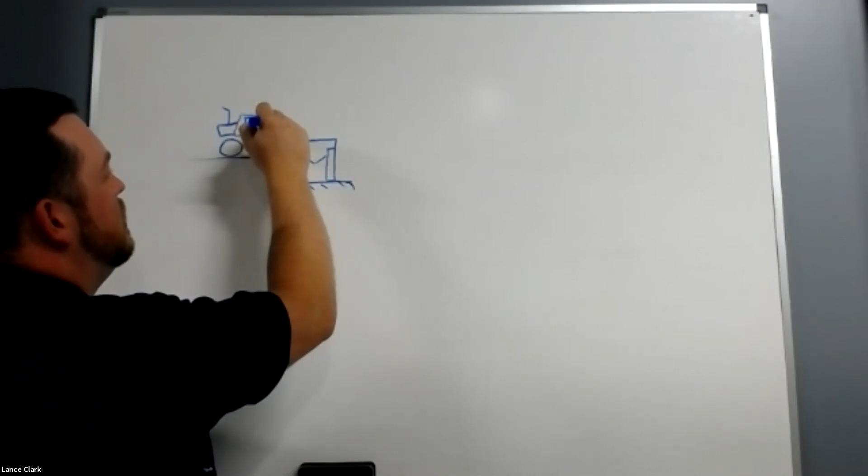He's got to feed that. That's a terrible loader, I know, so don't make too much fun of me, right? It's got an exhaust stack and windows, all that good stuff. Put a door.

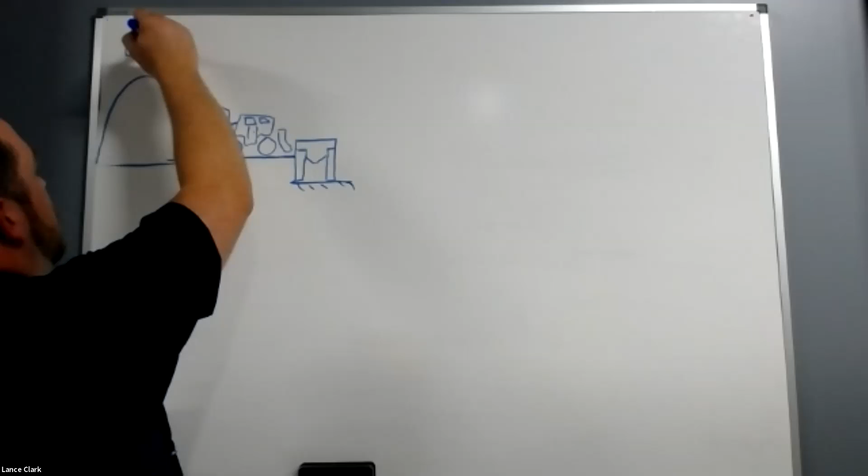So what's going on over here? He's loading this, but he also has a stockpile, right? And as moisture comes down and soaks these piles, if there is nothing to keep the water from draining off, then it will just pool up under the pile.

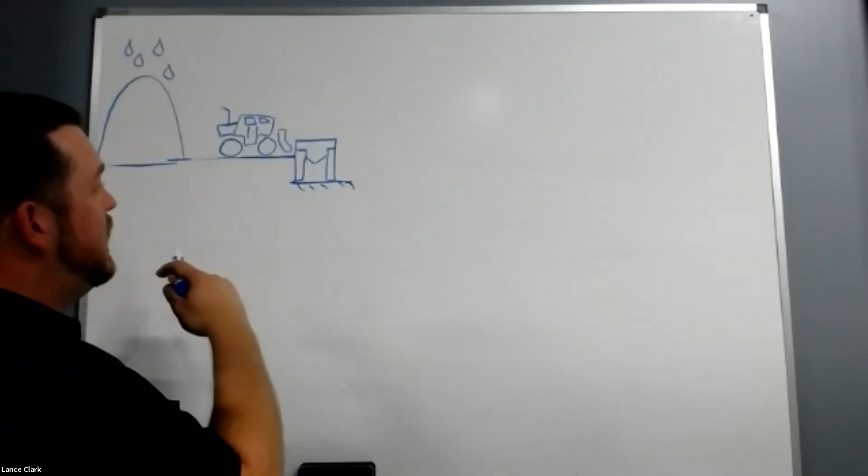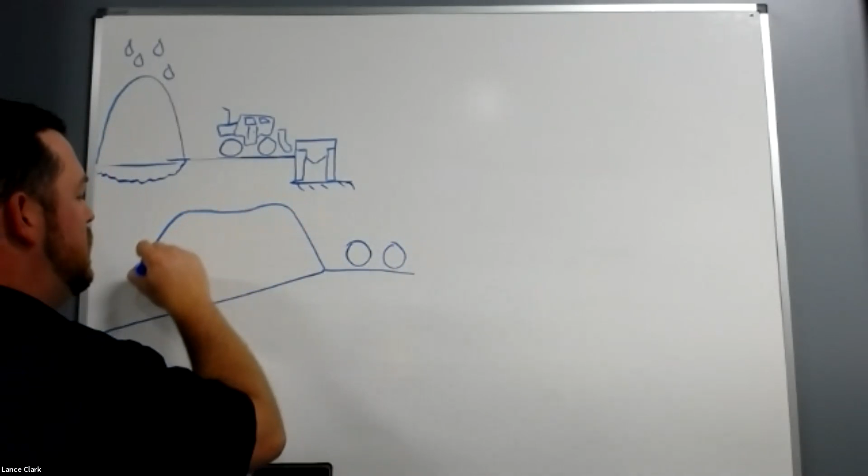So ideally what we would want is, as the loader is feeding this, that we have a slope to maintain. And the loader is still here feeding the bins, and the aggregate pile comes down like this and allows the moisture to run off and collect down here.

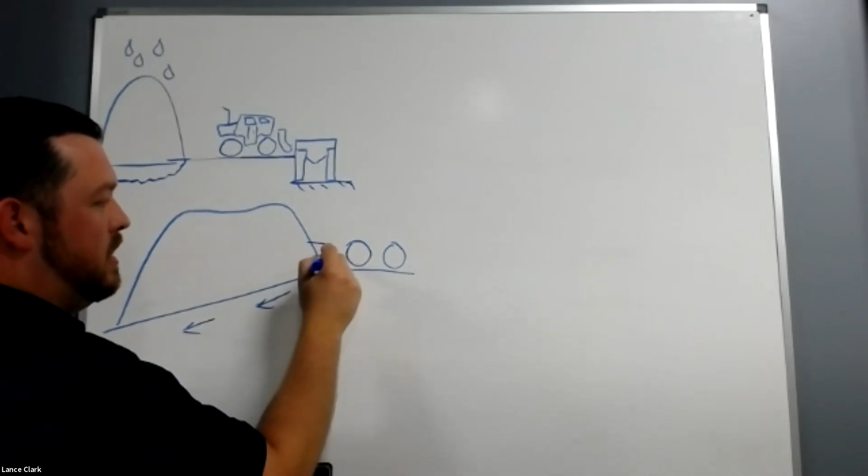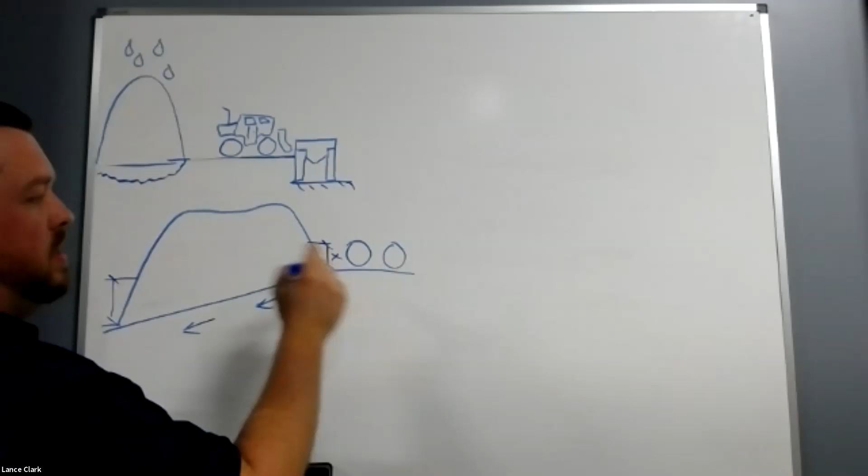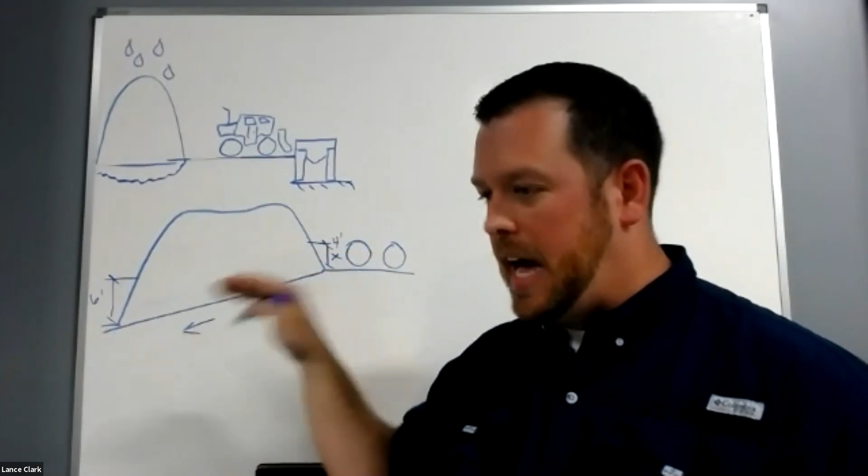And the loader, of course, you want it to try to grab a bucket here in this area, but you also want this to be about the same distance. And typically this is somewhere around 4 to 6 feet, just throwing a number out there. 4 to 6 feet. I hope everybody can see what I'm writing here. And what that allows is the moisture to get out of the material before it ever goes into the drum.

Now, again, I realize that not everybody has, trust me, I know the arguments, right? We don't have the space, we don't have the place for it, we don't have the drainage ability. There's a ton of we don't haves that we can list out. But my job is to just tell you best practices. So this can't necessarily apply to every single asphalt plant. However, if you have the ability and the room and the real estate to do it, this is the easiest way to get moisture out of a product without burning fuel.

Now, here's another really good thing: the different products act differently, right? I'm sure all you QC guys out there nod your head. Some of the products act completely different. So if you have a sand or a screening pile, it is going to retain a lot more moisture than your 57 stone or your 5s or whatever range that you guys have it in, from 1 inch to 1/2 inch stone.

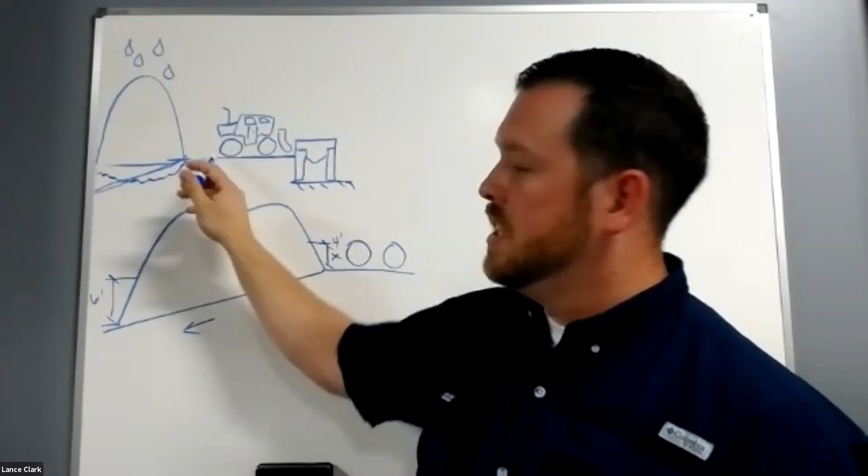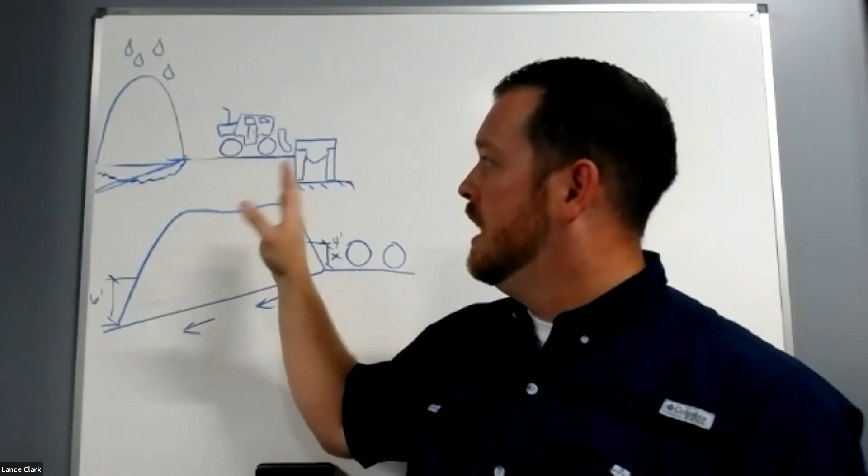So like in this picture here, if you were to have sloped that like this, the loader is still on the same elevation as the bins. And now you don't have that uphill pull on the transmission of the loader. So now you're saving wear and tear on the loader as well, because you've got to remember in that mix cost estimate, equipment is in there. So think of the money that you could save, or the maintenance that you could push off, if you didn't have the extra wear and tear on the loader too.

So that's my thought. I could mic drop right here and be done, but I've got two more things I want to talk to you about. But I hope if you get nothing else from this today, that's what you take, because that's something that you guys already have, right? Everybody has a motor grader, everybody has a paver, and most of the time you can get a truck. It's just having the money and the effort to do it.

Now, everybody's a little bit different in their costs and their fuel savings. So I'm not going to say you're going to save $1 million a year doing this, because everybody's scenario is different. I know I'll get hung up and they'll say that Astec guy told me it was going to save me $1 million and it didn't. So I'm not going to go down that path. I'm going to keep moving on.

And the next thing that I want to talk about is a VFD for the exhaust fan. That's something that is pretty commonplace, right? I know probably when I said these three things at the beginning of the presentation, you guys were like, oh my gosh, these are three things I'm already doing. Well, you would be surprised. I literally visited a plant, I guess it was 2 weeks ago now, and he had just that month put a VFD on his exhaust fan.

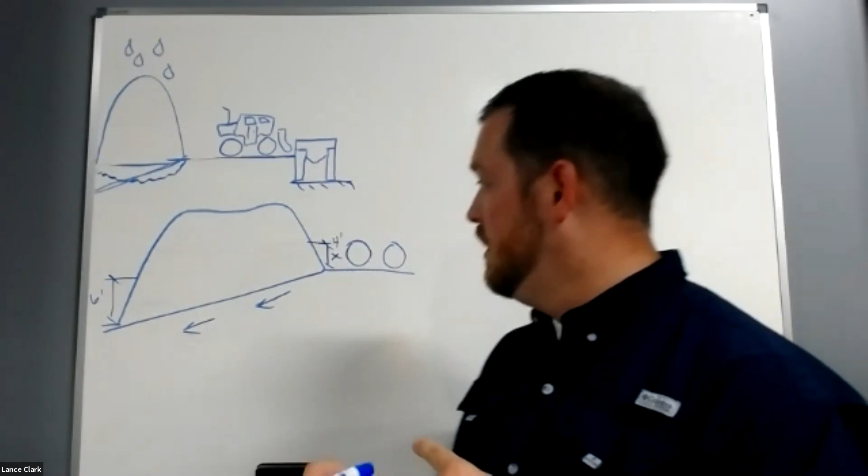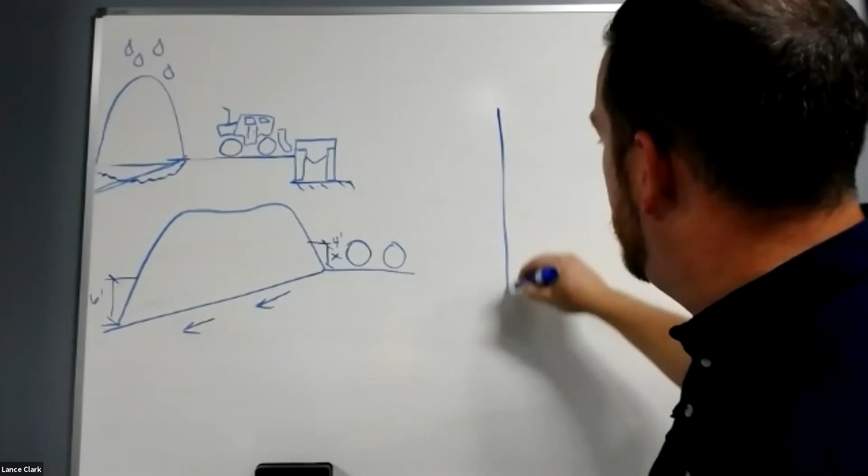So I'm going to turn around here again. I'm going to erase, actually, I'm just going to do it right here. That's okay, I might step out of the camera a little bit. I'm probably going to do a terrible job at this, but I'm going to try. So we're just going to do a regular XY axis. This is going to represent pressure through the system, and this is going to represent airflow.

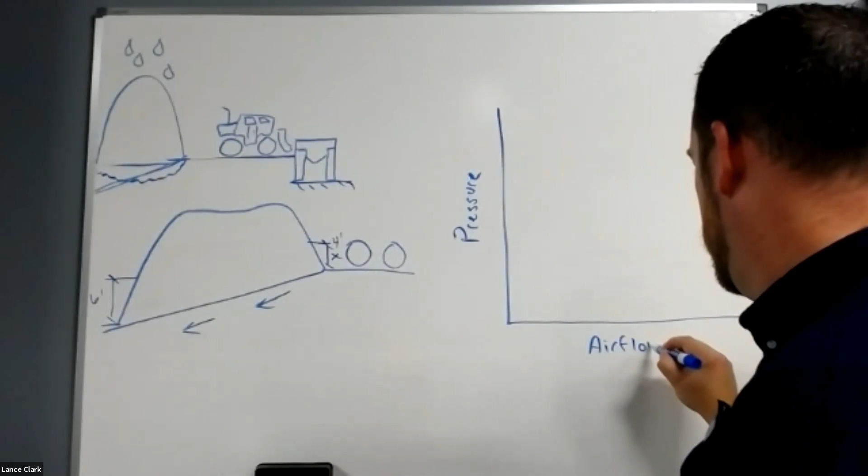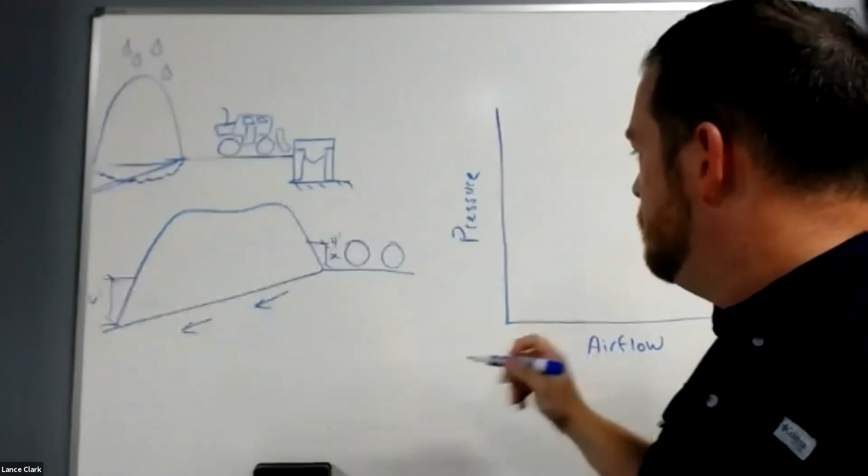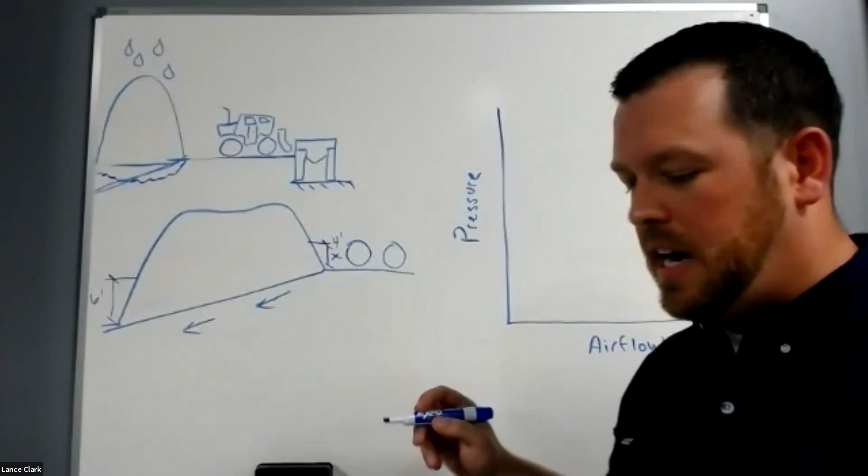And on a common asphalt plant, and again, I know everybody's is different. Mine's set up this way. This is over here. I've got elevators and you've got drags. But through a typical system, going through the entire system of the ductwork or through the drum and trying to understand that airflow, that curve, that fan curve, if you will, looks something similar to this.

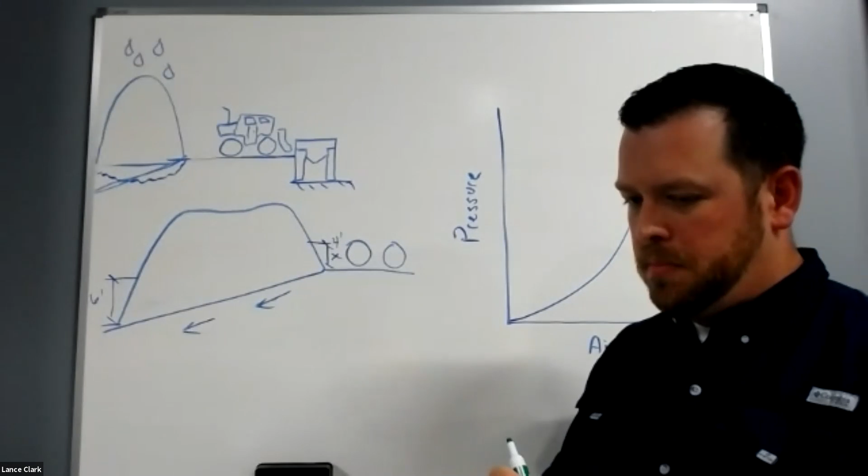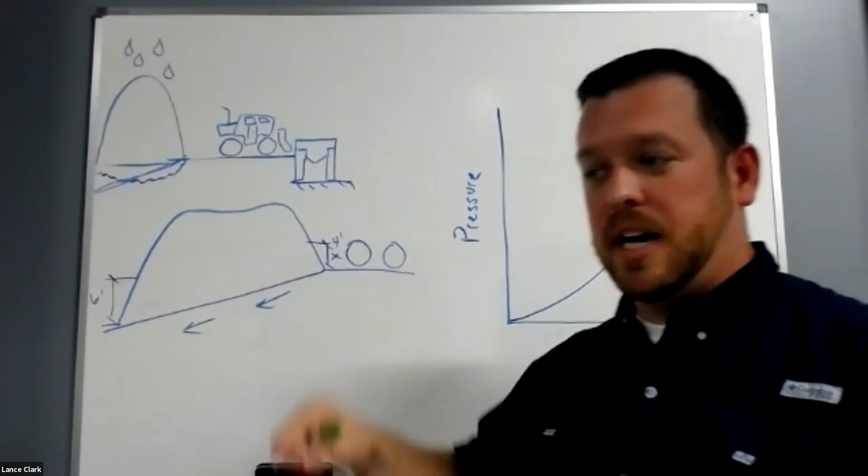So as the airflow increases, the pressure increases. I'm going to change colors on you here. And the motor, the actual fan RPM, looks something similar to this. When it starts, and this is on a mechanical damper now, right? I'm sorry, I'm probably talking two different speeds. This is going to be based off of a mechanical damper. So with a mechanical damper, you hit go and boom, it is turning. So it's automatically at my top, and as it changes, it does this and kind of falls off.

Sorry, I know I didn't mean to do that. Sorry, I was standing right in the way.

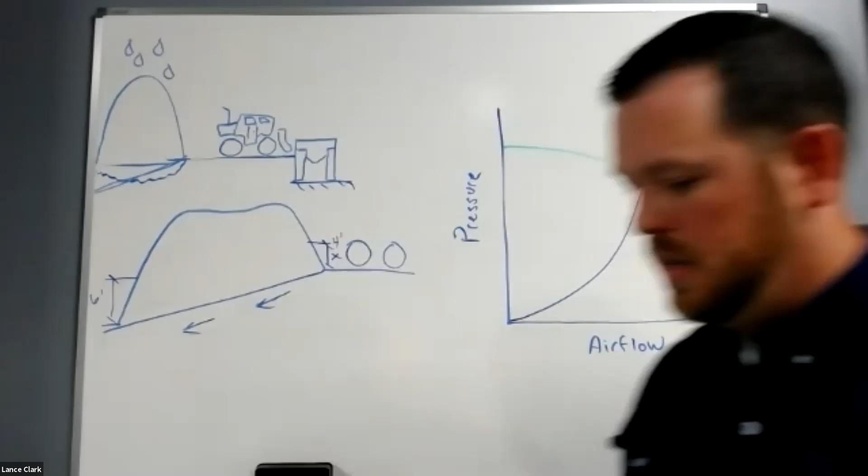So if we add in horsepower, it looks something, I'm going to change colors again, like this. So what does that mean, right? You're like, dude, I have no clue what you're even talking about.

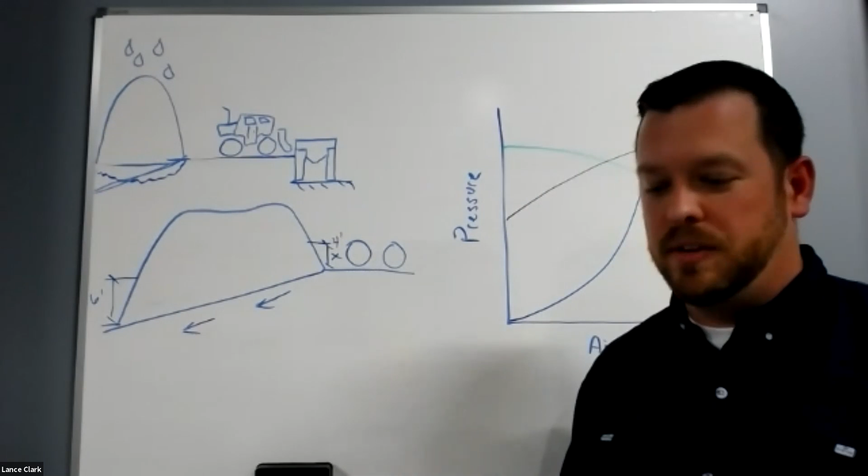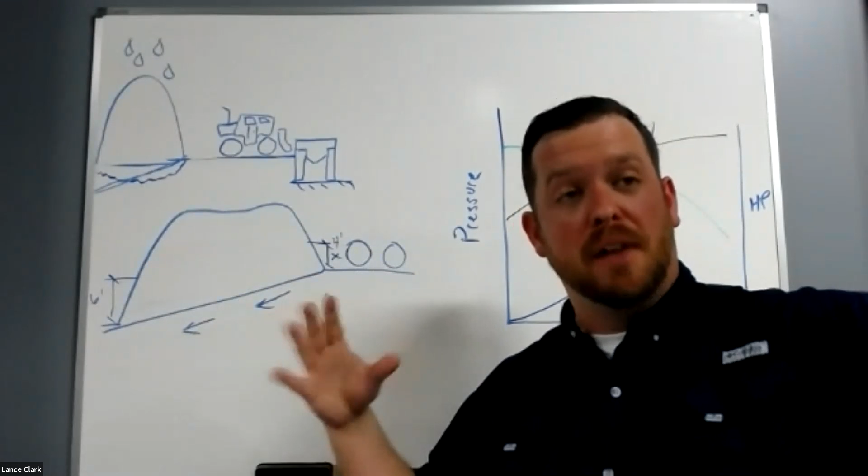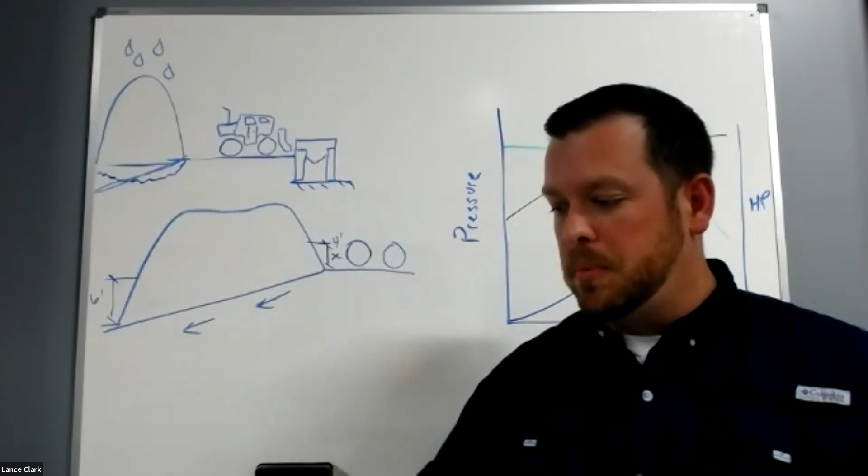What we have is the baghouse fan damper is way down the line, right? It's sitting right on top of the fan. So if you have an issue at the front of the system, like you're puffing, you've got too much airflow, the drum is puffing, right? And it's puffing too much and you have to increase it or decrease it, whichever direction you're going, up or down. As you change that airflow, it tends to get off skew if you're increasing or decreasing.

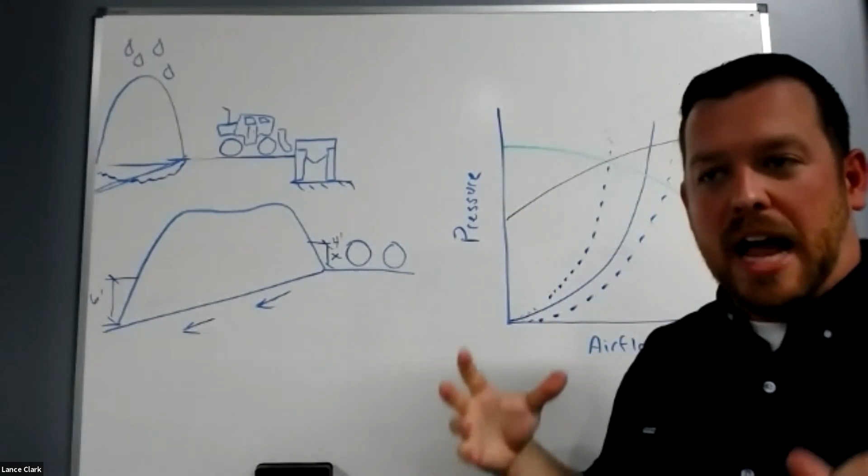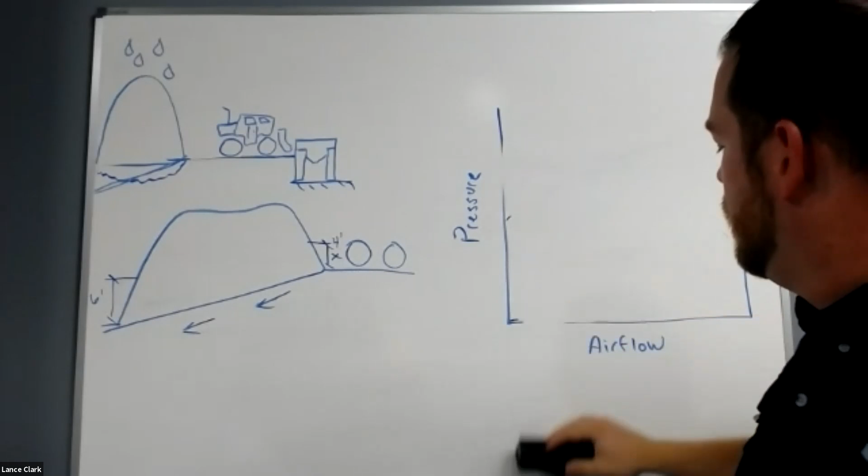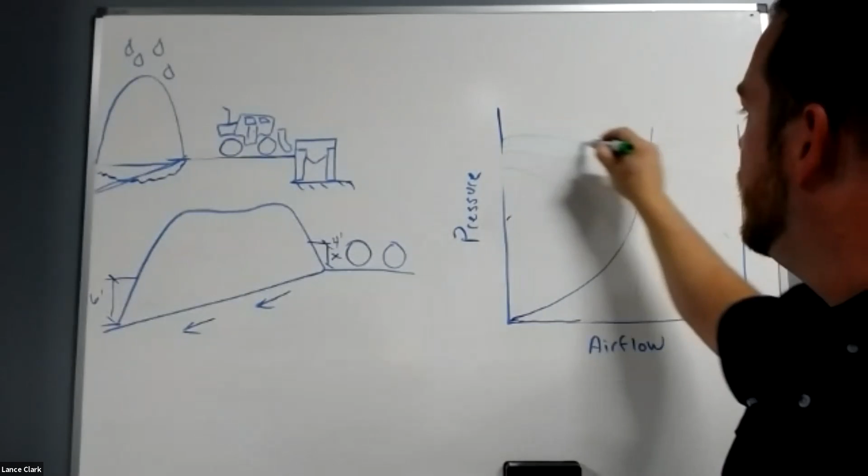So your fan curve will change because you're adding more pressure into the system, because you're essentially choking the fan off, and you're adding more pressure into the baghouse as you're doing that. But what happens when you add a VFD to the system, this neat little curve right here that we had for our fan, now all we have to vary is the fan RPMs. So instead of here, we can vary it down to decrease production, or we can vary it up to increase production. And guess what? There's no damper for opposition in the system. There is no extra added static pressure.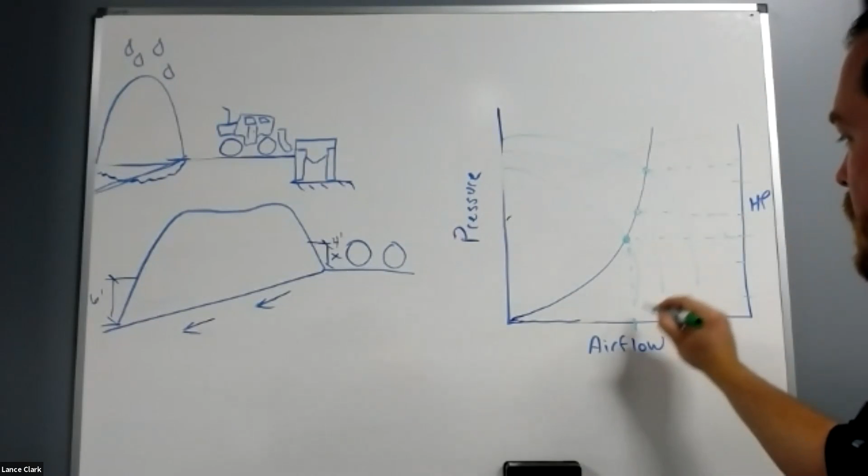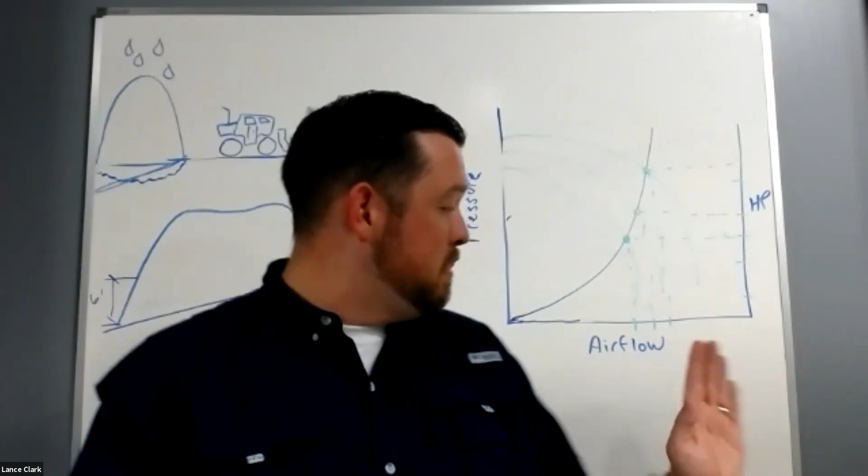And if you look at the horsepower when it comes across, like if I were to have lines here, you probably can't see that. Look at the horsepower requirements, where they are in association to these curves. So as the airflow increases up here, and your RPMs change on your motor, you're speeding it up and down, your horsepower changes. So what that allows for is at 50% airflow, you're only at about 12% of the power required. And at 75% of the airflow, only 42% of the power is required.

So think of the savings that you're going to get by adding a VFD in this system, just by controlling the power demand at the asphalt plant through the fan. Just by varying the speed, you're consuming less energy. Now, what I said earlier that's great about this too, is that you also save on the wear and tear of the fan. You're not turning it wide open all the time, also increasing and decreasing the static pressure inside the fan. So you're really giving the fan a break by adding that VFD on there.

So there's also a second way that we can look at this too. And this gets into some stuff that, not that I understand this overly great, but on the utility side, there are periods that your utility company will look at, and I've heard as low as 15-minute intervals, and I've heard as much as 30-minute intervals, and they will measure that interval and whatever peak demand you had at that time.

So at plant startup, when you're boom, boom, boom, starting all the motors, the electrical demand is going up and up and up. If they look at that 15-minute interval, they are going to charge you the highest rate because of the demand at the plant. But adding a VFD to the largest motor at the plant, typically, I know some motors on the drums can be very big, but typically the baghouse motor is a big draw.

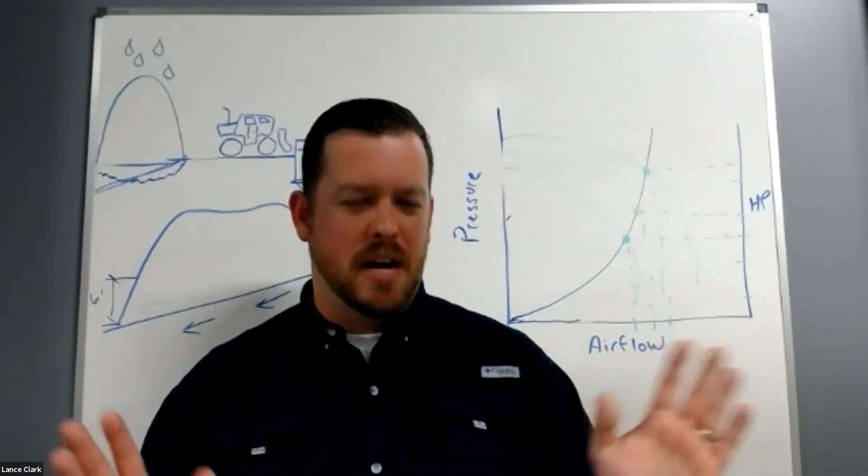And again, I know nobody on this call has ever had that happen, right? Not a single person has ever had that happen, right? And you guys are perfect, and I'm the only one that has to deal with that kind of stuff. I understand. But

in the years that I spent on the road, calling on customers and specifically talking about liquid asphalt storage and heating and transferring materials and keeping it good and hot, it amazed me the amount of contractors that would not insulate their piping, and honestly would knock down, drag out, argue with you about it. And I've said it multiple times, us as an asphalt contractors community, we don't shy away from our opinions, do we? We like to give our opinions. We like to tell each other what we think's better, and you're dumb for running that.

I'm not advocating that. I'm just being real. It's that we like to pick at each other and say that one way is better than the other.

Well, I primarily focused on customers that were in the south central part of the U.S., so like Texas, Oklahoma, Arkansas, Louisiana. A lot of those states were in hot zones. It's always hot in Texas. It's always hot in Louisiana, and even now, my heart goes out with everything that's gone on with Ida.

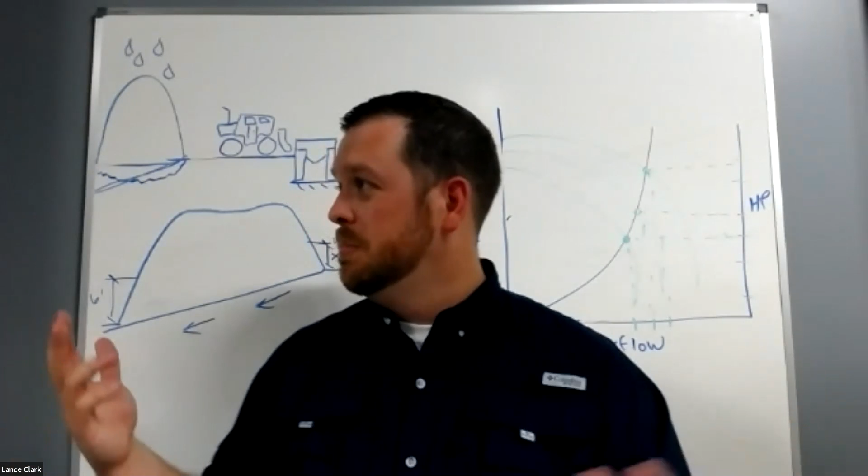I'm here at Astec Industries today, in Chattanooga, Tennessee, we're right on that band, and we've got some terrible weather out here today. I don't know what you guys are experiencing, but we're seeing the effects of that today, and it's just heavy rain. My heart goes out to the folks that have struggled in New Orleans with Ida, and a lot of them were contractors that I called on and have a great relationship with, and I feel for those guys, because I have no clue what they're going through right now. I'm sure their panel boxes and trucks are underwater. So definitely feel for those guys.

But the point that I'm trying to make, I'm sorry I got off topic, is that those guys, when they live in those states, just automatically think, well, it's hot outside. Why would I need insulation? It's 90 degrees out here and 100% humidity. I'm sweating as I'm talking to you. Why would I need to insulate the piping?

Our previous service manager at Heatec, his name was Ron Henry. Some of you guys might know Ron. Ron used to always say, when the ambient temperature outside is 300 degrees, come talk to me. So I always liked that saying, because hot is a relative term, right?

Think of the difference between 70 degrees and 90 degrees, say at the same humidity. It's hotter, right? Well, that's 20 degrees difference. Now think of 200 degrees difference from that, to go up to 300 degrees, because all you guys are running heaters set at 300 or maybe even 320 or 330.

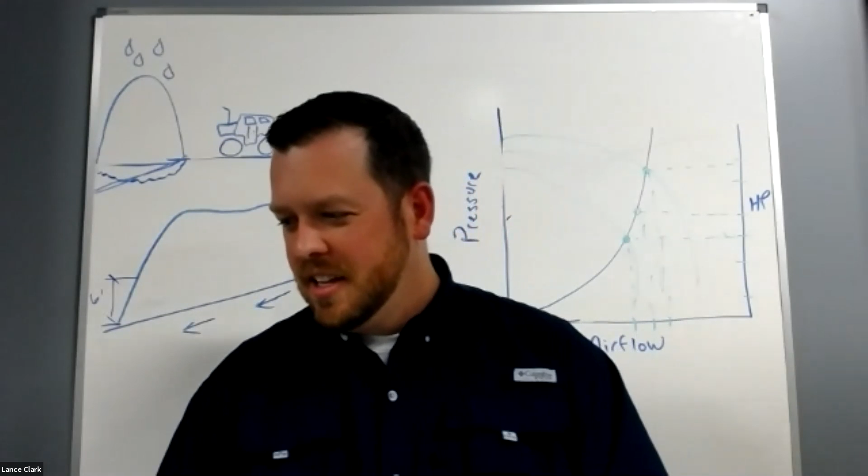All right, you guys are awesome. Everybody said yes. Good for you. I am proud of you. If I could give you, I hope you can take that, that's a high five because you guys are awesome.

So most people don't do that. They don't tune their heaters up, and they can get out of whack, because we want one that's modulating, right? We want one that, if it requires more heat, ramps it up, and if it requires less heat, ramps it down. Almost like a VFD, right? A modulating motor, so that way you're not running full bore or any lower. You want something that will modulate, so you're saving fuel and you're saving energy.

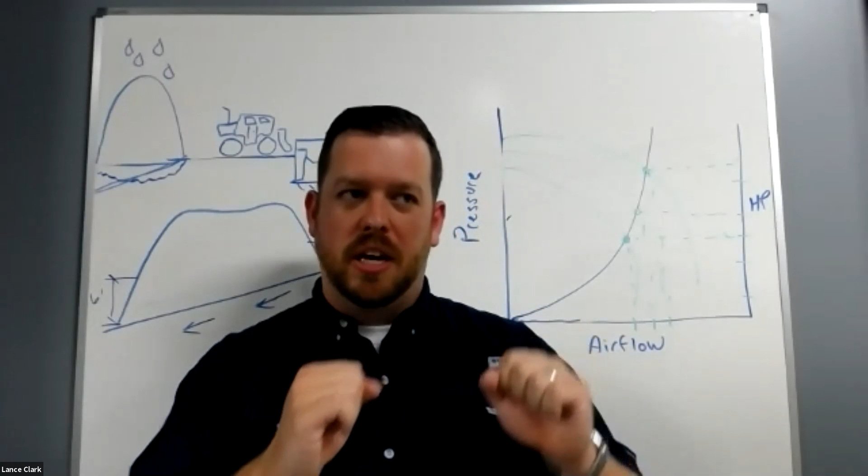Well, as they do that through the year, it will kind of work that mechanical linkage loose. So it's always important to have somebody come in and test it and make sure everything's looking good. You're not burning unused fuel, you have the right amount of air going through the system, and everything is happy. Because we don't want to shut down, right? We don't want to be, oh, the heater just crapped out, now we got to call the trucks off. That's a bad day, right?

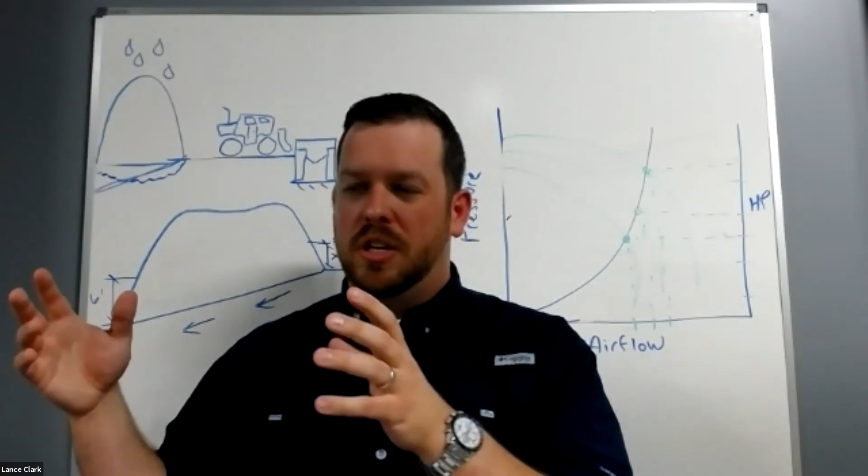So if there's anything else I can say as far as the tank farm is concerned, it's that the heater will run most efficiently as long as you're maintaining your heat load. What I mean by that is that your terminal or the refinery or the wholesale, wherever your liquid is coming from, it is easier to take it off the truck at 300 plus degrees, because they're going to heat it up to transfer it, right? They've got to heat it up to pump it into the tanker, and they have to maintain that temperature so that when they offload into the tanks, it all gets out. You don't want to be carrying a tanker back with residual in it.

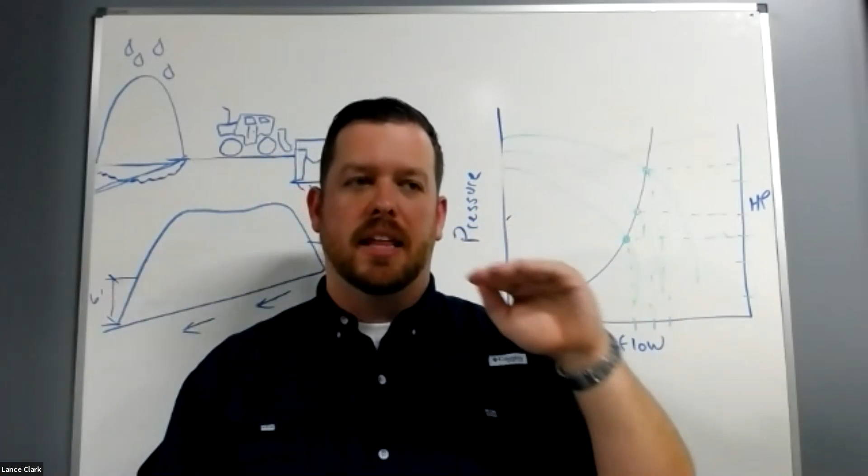So it's easier to put hot liquid in the AC tanks and maintain that temperature, as opposed to letting that temperature fall and then boosting it up to where you need it for production. Because what do we do at the asphalt plant, right? We turn the mix up. We get that guy in there that says, man, I want an extra hot load, right? I want it extra hot. Well, it's easier to keep your material at temperature just as you put it in. The heater will run more efficiently doing that, meaning it is going to burn less fuel.

Maintaining that temperature, as long as the tanks have plenty of insulation, the right amount, and you don't have any jumpers restricting flow in the system, and it's got good flow, you're going to be fine. The heater is at its most efficient point, especially if you tune it every year like you guys have. So it's critical that we try to maintain what I call a maintenance load. Have the tank farm on a maintenance load, so you're not boosting your asphalt temperature all the time and wasting fuel with the burner running wide open and turning off.

Because remember, this scenario is similar to the tortoise and the hare. The big burner on the drum, you run only as necessary. Yeah, it uses more fuel, but you also turn it off at the end of the day. You run your shift, you turn it off. What's out there purring all night long, day after day? The burner on the heater. So if it is tuned right and it has good flow, you won't have any problems, and it's running as efficiently as it can.

And this is just a tidbit, one other thing I've seen, especially within the past couple of years, is the thermal fluid, the different brands of thermal fluid out there, and check it every once in a while. You know, don't just run.

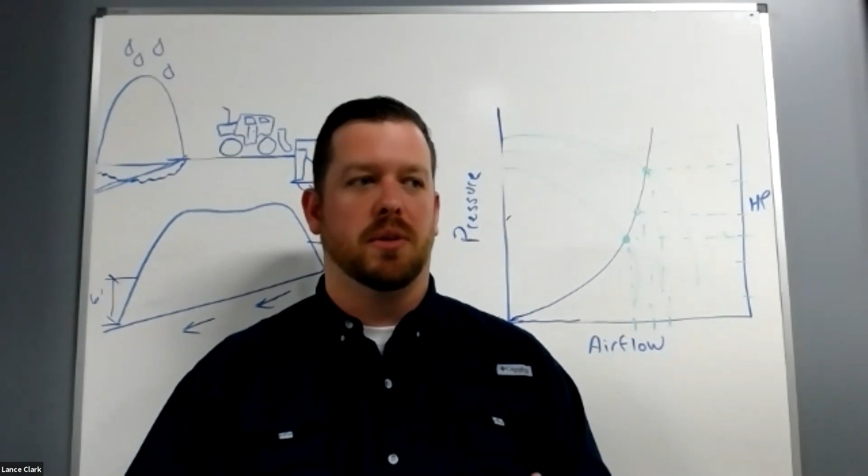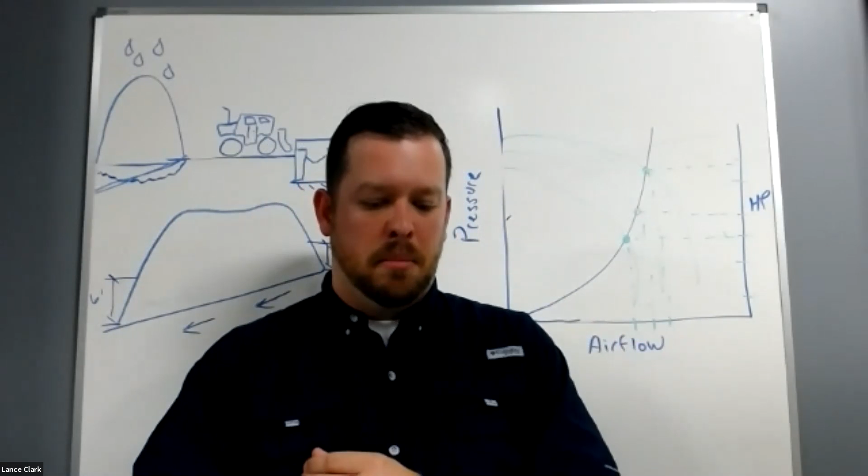So if you've got a good place that you can break a line and get an oil test, I highly recommend that. And if you need recommendations on people, I'm sure you have local suppliers, and I'm sure they do a great job, so get with them. But if you need some help with that, get with your vendor of choice, and I know that they'll all help you as needed.

So in conclusion, I'm gonna wrap up here in just a second. I'm gonna share my screen with you one more time, so that way you can see this last PowerPoint slide. Just a second.

So in conclusion, there are many ways to save money in an asphalt plant. Some of them are easy, some of them are very complex. But if you look at this list that I've got shown here, there's 9 different factors that go into a plant's production. And if you look over this list of all of these factors that influence the plant's overall production, there's a lot of these on here that are very controllable. It's not anything really out of the realm that's overly crazy to control.

So if you look at just the very first one, the exhaust temperature, that's something that the operator's controlling every single day, literally with a push of a button. Excess air, what does that mean, Lance? That means air required in the system to burn off anything excess that is not consumed in the combustion process. So if there's some kind of extra emission that you have to handle, typically this is with the burner. The burner is having to introduce more air into the system past the combustion process.

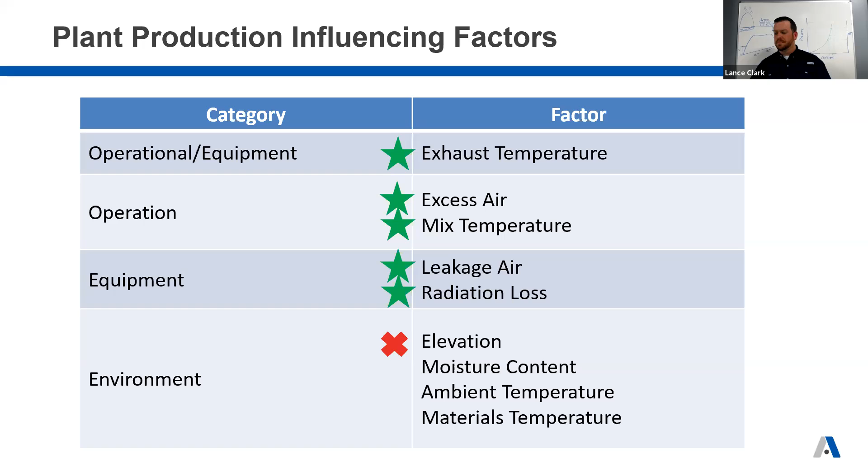The moisture content we can control. That's something that we can do a really good job, maybe a better job or a good job, however you want to say it. We can control that, right? For grading our stockpiles, even in Europe, overseas. And again, I know I went there. I know I'm talking to a bunch of guys from Michigan, but still, overseas they'll put materials in buildings. They'll even build bunkers and keep material in bunkers to keep the moisture content down. But that's something that we can learn from, to use their practices and practice them here in the States.

Ambient temperature, we can't help that, and material temperature. I put an X there, but still, you probably could somewhat handle that, because if you can control your moisture and where you're putting it, the temperature doesn't have that much of a swing. But still, in all reality, we can't control the weather outside. We can't control Mother Nature. So I still put an X there, because we can't control if it's going to be cold or hot that day.

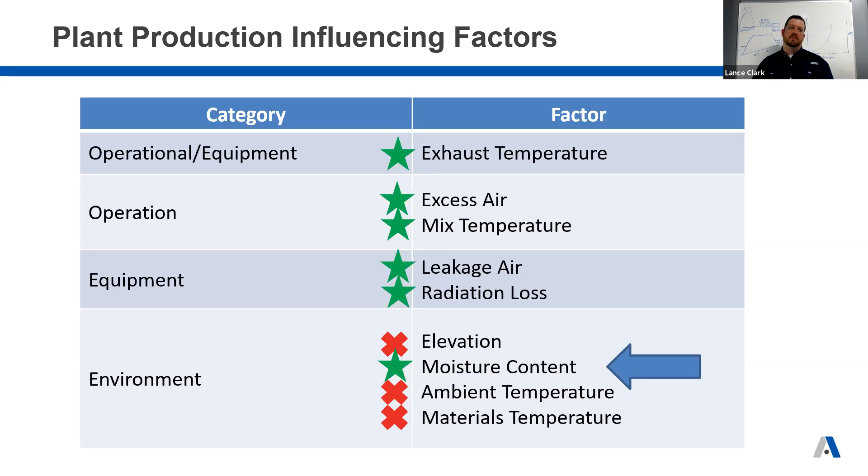So if I'm going to wrap up here, if there is nothing else that you left with today, I hope that, again, moisture is key. If you want to save money and you want your plants to operate as efficiently as they can, controlling your moisture is the most important thing that you can do, and it will save big bucks. And if you do that, you can go to your owners and your uppers and your accountants and say, show me the money from what I've saved you, because controlling that moisture is key. It's the most important thing.

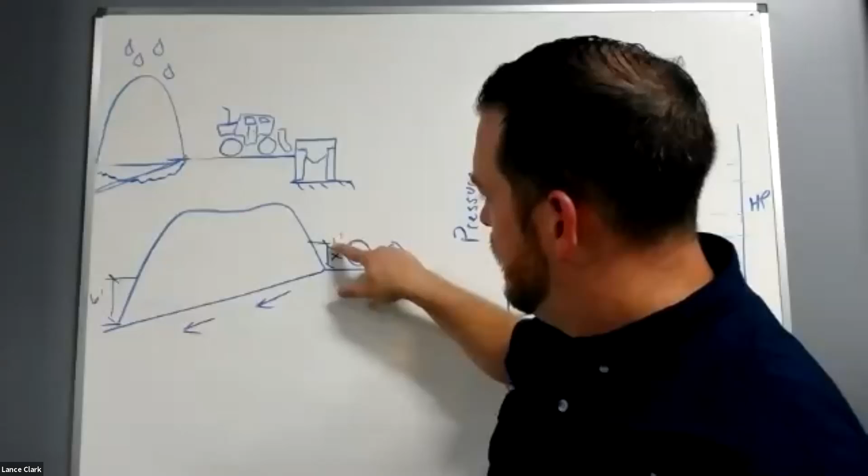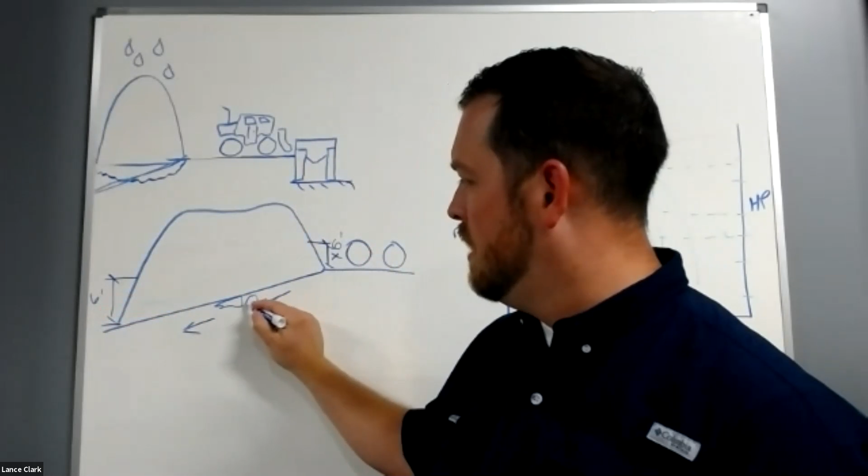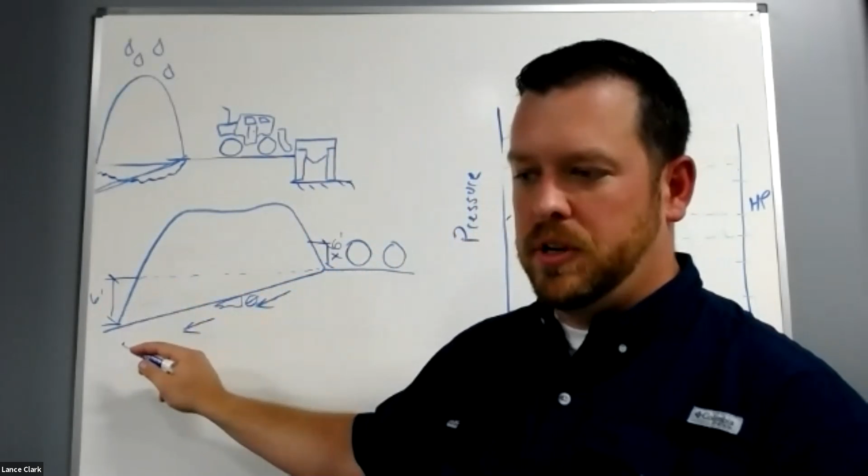That's right. Typically, everybody would just say, whatever you do here, do here. So if it's 6, do 6 here. So whatever that slope may work out to be, in some technical manuals we would do it at like a 4 foot difference from this point over. I don't know whatever that rise and run is, I don't know the ratio. Would that be 1 to 4? Well, I think so. It's got to be a run of 4. Otherwise, if it's a run of 1 and you're dropping 4 feet, that's quite aggressive for a slope.

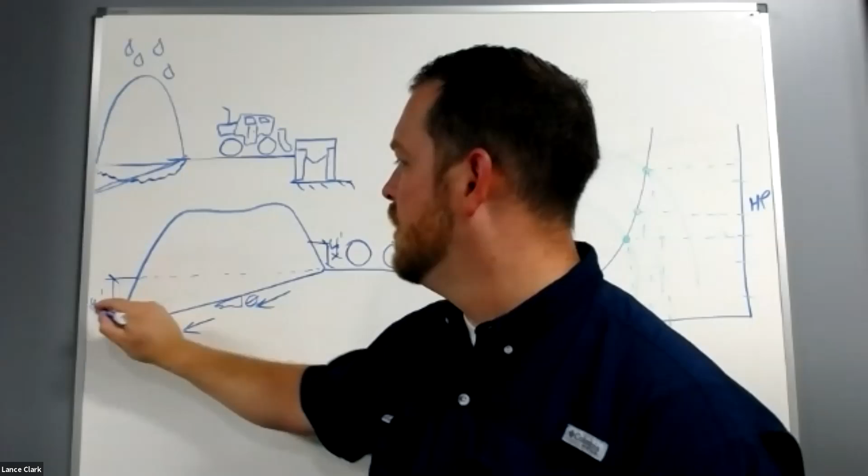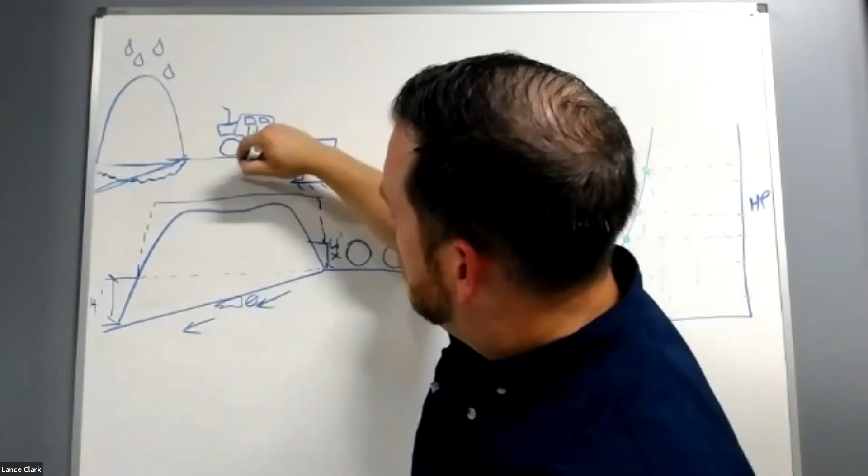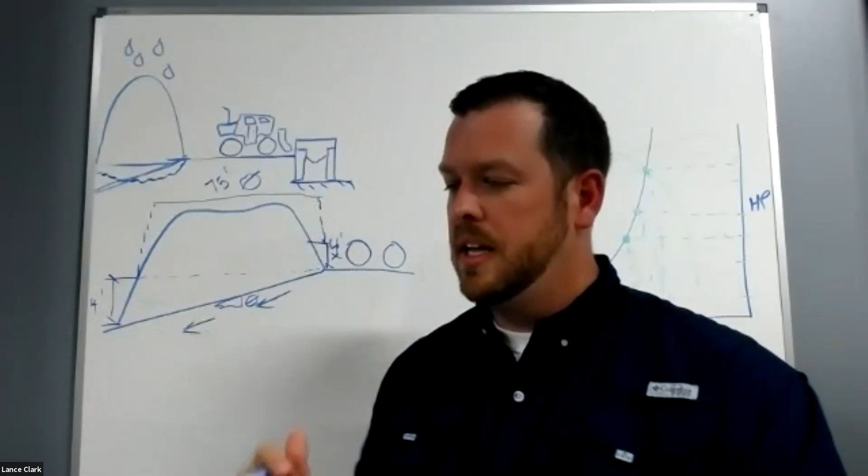Yeah. That's why I was saying it's obviously a function of how long that stockpile is, so I didn't know if you had a percent. Yeah, in the example that I pulled from, this overall diameter is about 75 feet. Okay. So even if it was a rectangle like the one that I showed on the screen, it was about 75 feet from end to end. Okay. I hope that helps.

Yeah. All right. We've got another question here. Can you discuss the importance of utilizing sun direction to help dry the stockpiles? That's one thing, just to kind of tack onto that, NAPA's working on updating some of their guidance on ways to become more efficient at their asphalt plants.

And a lot of the folks down south talk about covered stockpiles. Well, that's great down there where they get rain every afternoon. But up here in the north, we hope to use the sun to dry out aggregates, especially when it gets colder. Covered stockpiles will tend to freeze and or not dry out. So that's a good question: utilizing sun direction to help dry stockpiles.

So do you have any thoughts on that, the importance of utilizing sun direction? I mean, I think it's gigantic. Anytime you can use that to your advantage, you do it, right? That's why we try to put solar fields up on good flat areas where, when it rises in the east and sets in the west, you have that optimum amount of time for the sun to hit it. Now, typically most asphalt plants are in fairly rural areas, and I understand that there are plenty that are not, and they're right in some metropolitan area like Detroit.

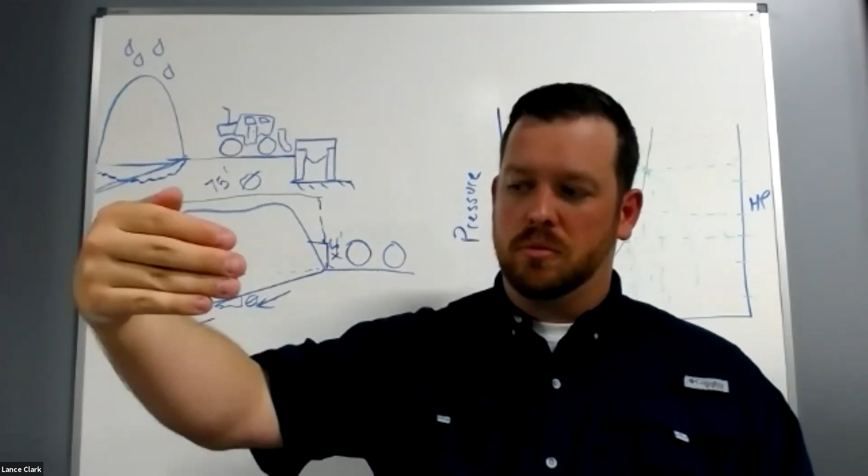But utilizing sunshine is absolutely critical if you can, and having the loader pull from that side. If you've got a side that's got a lot of radiant heat that the sun is bearing down on, have the loader pull from that side. He might have to go around, but still utilizing that is a big deal. I would highly recommend it. And of course, the higher on the pile, the less moisture it would have. The higher you get, the less likely it would be to be soaked with water. Sure. Okay.

I know you kind of shied away from providing any numbers on payback, but I thought I'd still put you on the spot on the VFD exhaust fan. I know it obviously varies on amount of production and everything, but just on average from the folks that you've worked with to switch over, is it a year payback, a 2-year payback, or what do people typically see? Knowing that everybody's different, I was just curious.

No, I appreciate the caveat, because my whole purpose is I don't want to mislead somebody. I want to set expectations and make sure that I'm meeting those. So with that caveat, historically on average, I'm just going to use round numbers, adding a VFD might be somewhere between $30,000 and $40,000, depending on where it is, what it needs, if it needs controls, if it needs outdoor rated cabinets. You can do it a bazillion different ways. So your typical investment from a vendor is somewhere between $30,000 and $40,000.

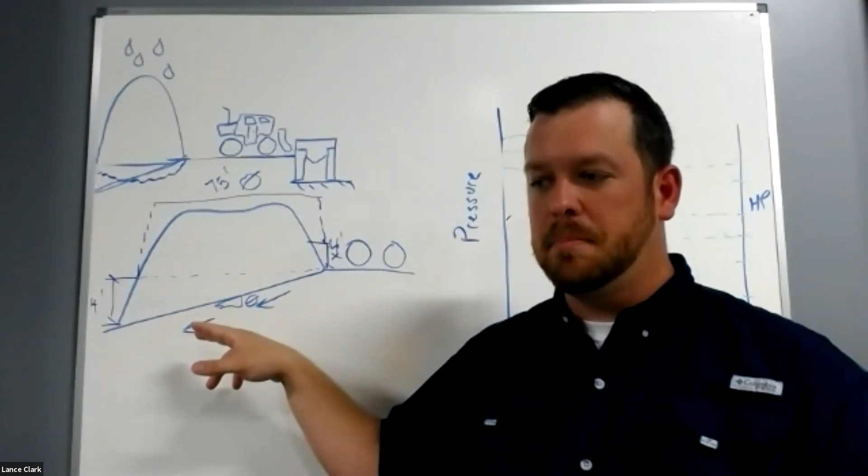So the problem with this is that you have to use asphalt, right? I mean, you have to use your product that you would rather sell to a contractor or to a laydown guy. You're using that in the yard. So you have to find the ROI to get that back. And you do that through the fuel usage that you wouldn't use. And we've seen customers pay this back quickly. We've seen them pay it back over the course of a year.

But I would say somewhere around 100 to 120 grand a year, something like that, of fuel savings just paying for that.

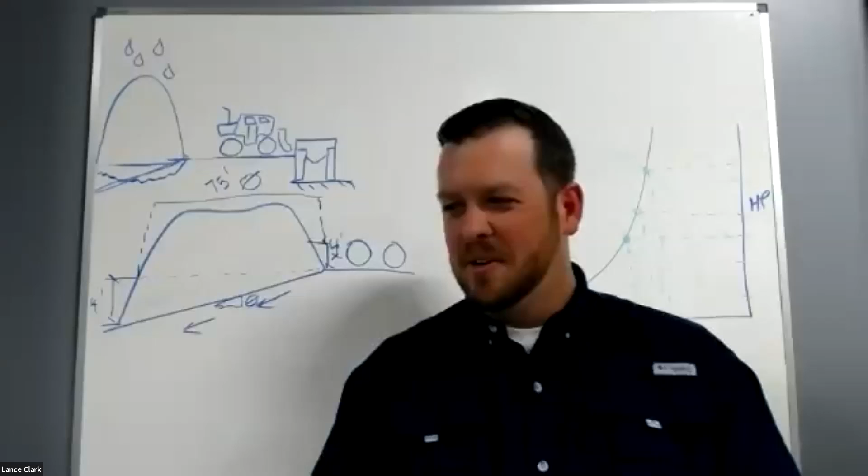My assumption when you were going through your presentation and you had the three items was that you kind of presented those in the order from greatest to least, but I thought I'd give you the opportunity to either confirm that or not. I think the tank farm thing did seem pretty eye-opening. I don't know what it costs to insulate pipes, but I would imagine it's not very expensive, right? No, I've seen it as cheap as they do it themselves.

They buy their insulation and their paving crew during the wintertime does it. They pull everybody in and they all jump on it and do it. And they spend $15,000, $20,000. I've seen contractors have to pay $60,000 and $70,000 because they want it just top of the line, and they want all this extra stuff on it. And again, when the plants get large and you get these big tank farm areas, that's just more surface area that you have to wrap. So it gets more expensive.

And the issue with this scenario is that a lot of people are burning natural gas, right? And natural gas is extremely cheap. If everybody was burning diesel and diesel was $4 a gallon, there would be no insulation in the stores because everybody would be wrapping their equipment, trying to save the best they can to drive their mix costs down.

So that's another reason people don't do it, because they say fuel's cheap, natural gas is cheap, I'm not spending that money. It takes too long to pay it back. My return on investment is too long. So that's that. I hope that helps. Yeah, very much so.